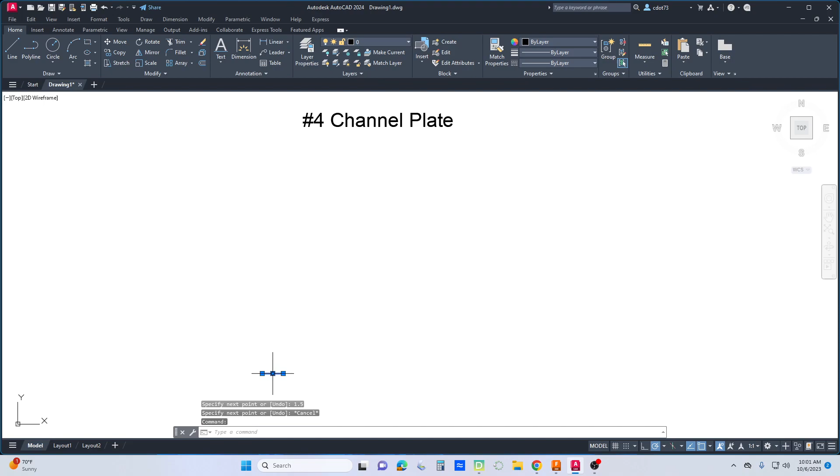So let's just get started. Let's draw a box first. Looks like it's going to be 1.5 inches wide. Let's do this. There we go, zoom in here. 1.5 inches wide.

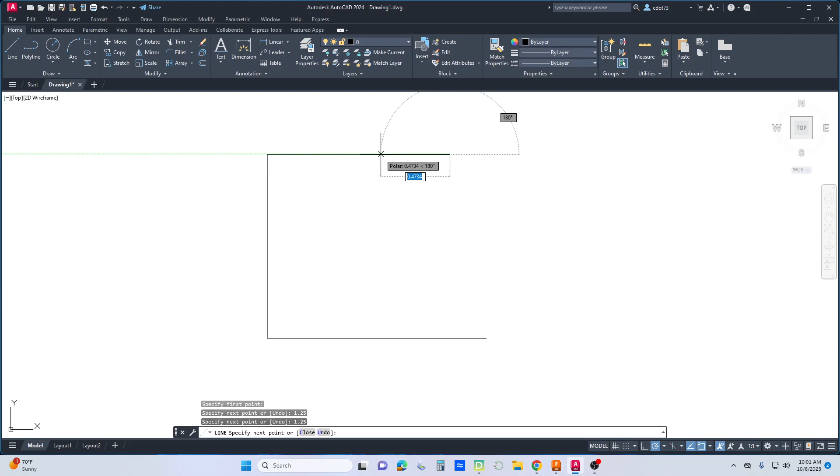On the height right here is going to be 1.25, and then we'll go ahead and go 1.25 on this one. It's running at a 45. I don't know what that's going to be right there, but we can do that later.

Let's do some offsetting. So start with this line right here. I'm going to offset it to the right 0.3, this way. Then I'm going to have another one. I'm going to go right there. I'm going to stop right there.

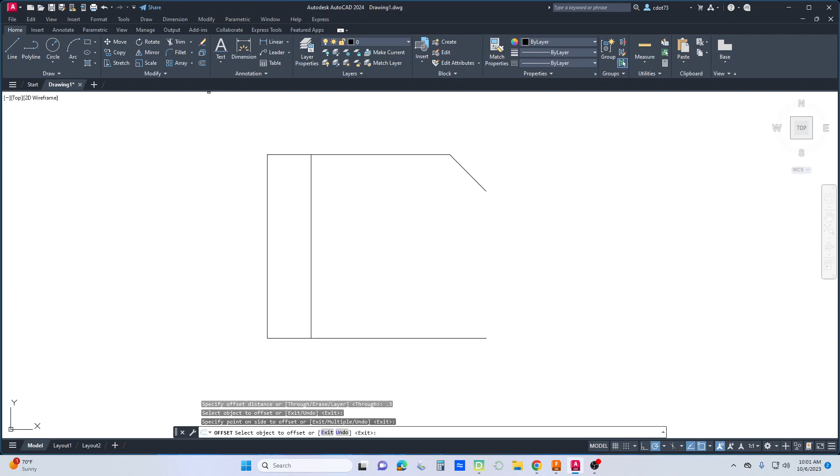Do another offset, just like this one right here. It's going to go down 0.2. This one's come up 0.2.

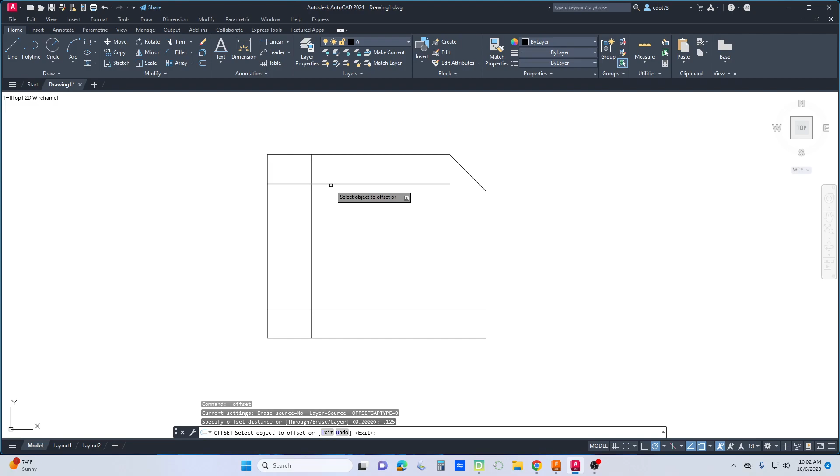That looks good. And then we need to do another offset. It's going to be at 0.125. And we'll bring this down here and this one up here.

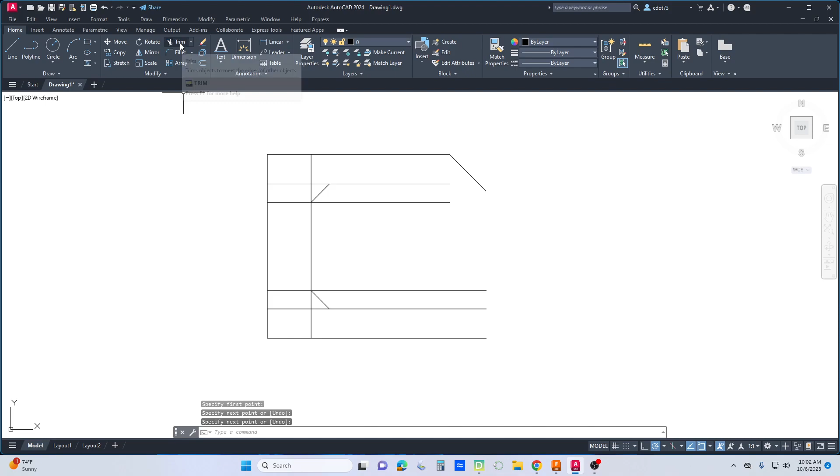Select your line command, right at 45. Repeat line. Do some trimming on this, trimming this out.

So far, so good. Let's work on the corners. So let's do some offset. Looks like it's going to be 0.25. Bring this back 0.25.

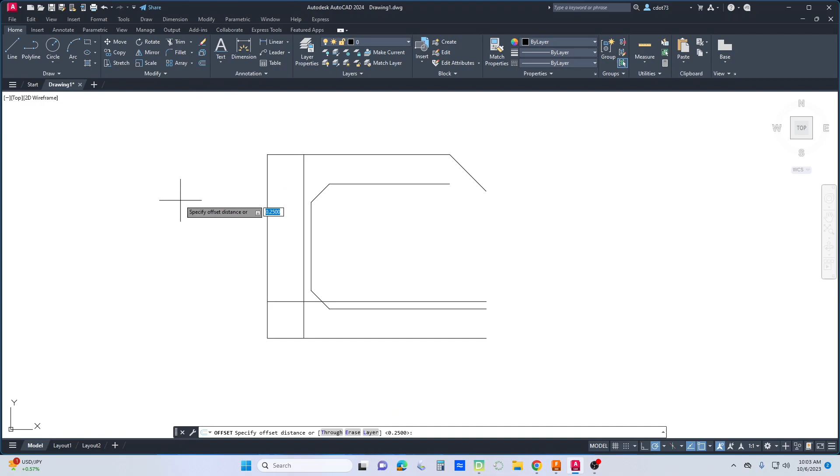Then we're going to offset off the bottom 0.25 once. And then we're going to offset this one right here. It's going to go up right here, and it's going to be a 0.75 right there.

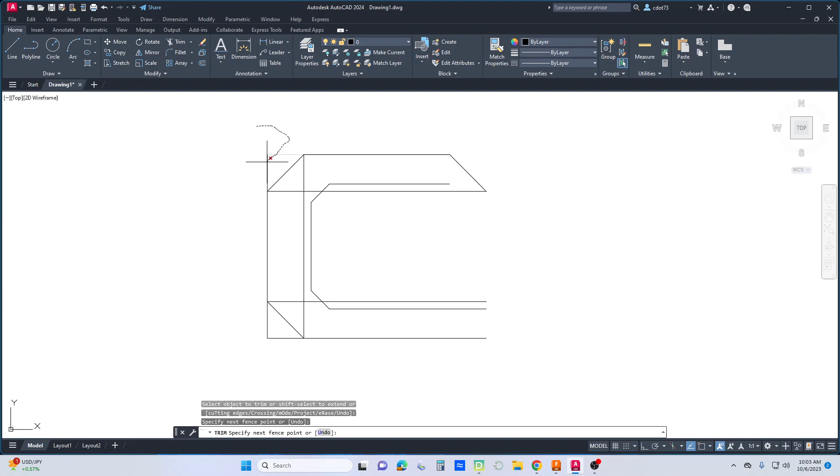We'll get our line command, we're going to draw on a line here. Repeat line, go here. Let's do some trimming. Enter. We don't need that anymore. So that takes care of the back part of this.

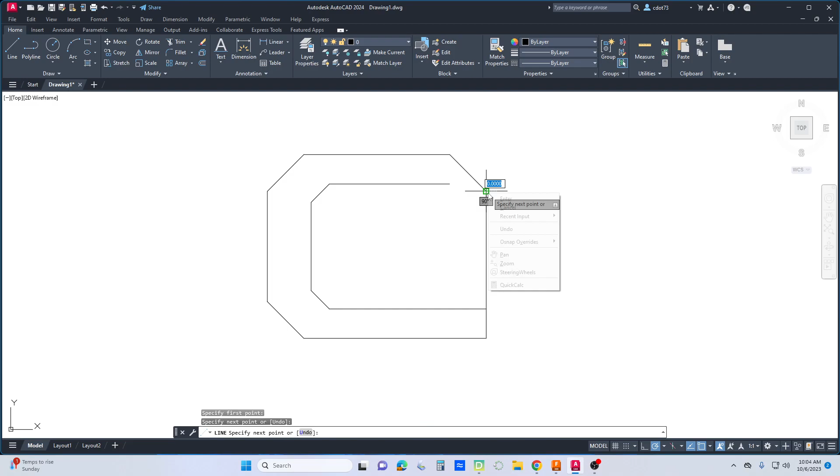Let's move up to the front. Go ahead and let's get a line right through here. Let's work on the bottom. I need to offset this line right here to the left 1/2 inch.

Okay, it looks like the bottom line, this line right here, needs to go up here. So we need to offset, and we're going to go 0.375. Set it right there.

And let's do some trimming. So I know I don't need this here. I don't need that, we'll leave that right there. I think I'm going to need to cut this out a little bit.

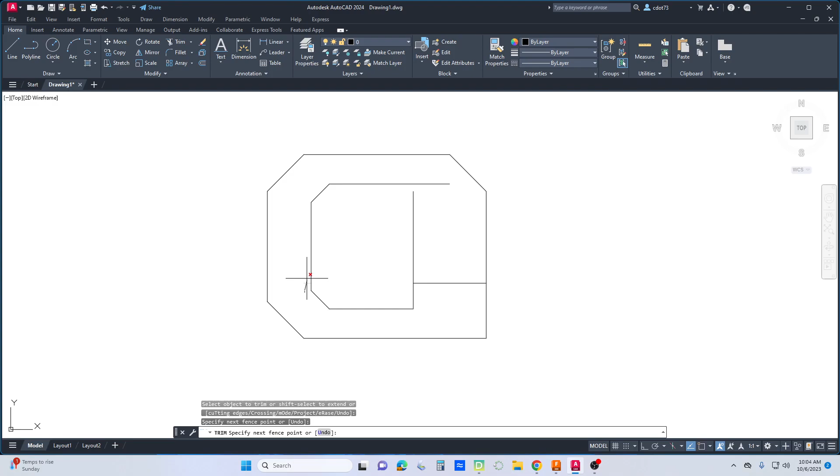And cut this. I do have an angle right here, and I know it's going to be 1.25 inches from here over to here. So let's do offset. And the distance you're looking for right here is going to be 1.25. See right there.

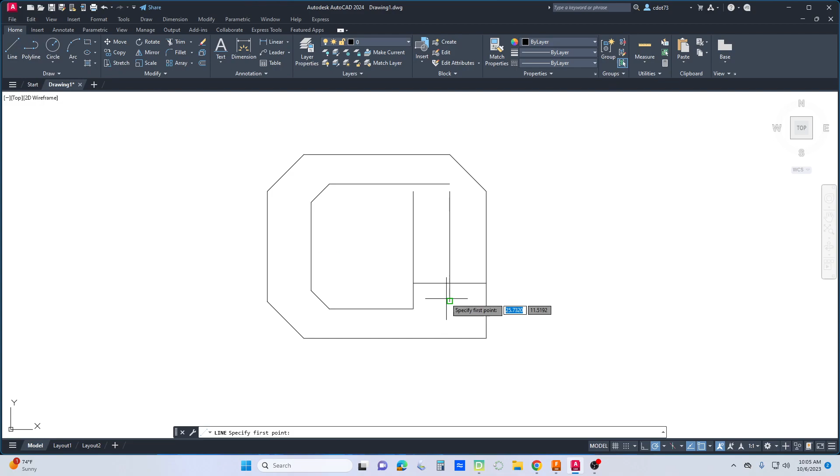And we're going to track with our line command, just track straight down, and we'll go right here, and then press enter. Then I believe that's going to be the same way up here, but we already had it right here, so we can get rid of that.

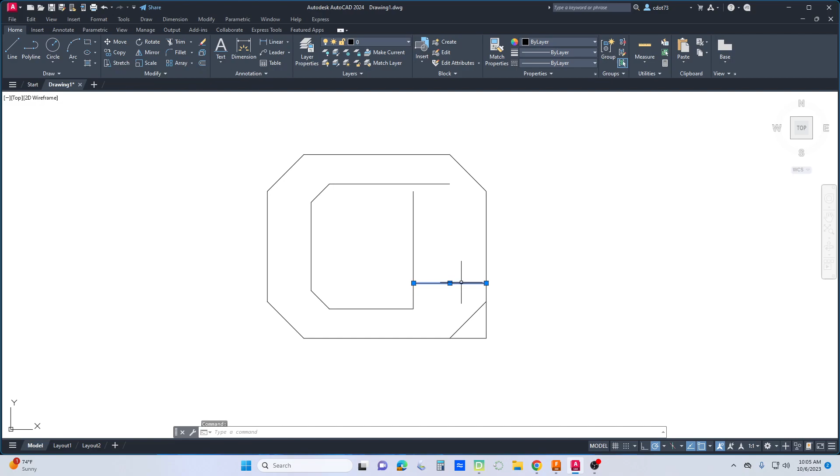Another thing we need to do is offset this one up right here to right here above it, and that distance is going to be 0.5, so we'll set it right there. Let's do some extending. Let's go back to trim.

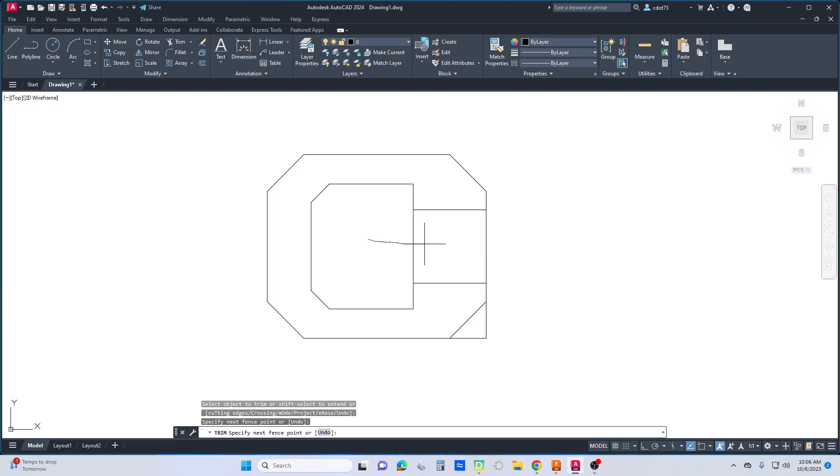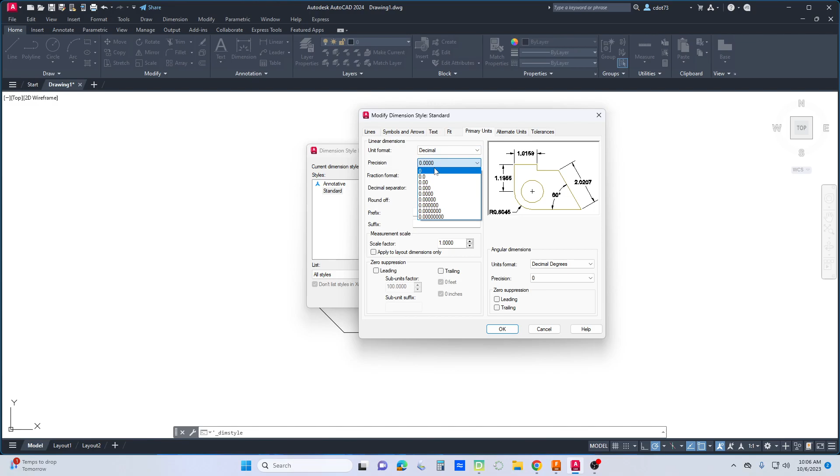Alright, dimensions. So make sure you have your menu bar, it's not hidden. You're going to go to Format, Dimension Styles, Modify, Primary Units. This one we're going to need 3 decimal places because we have a 125, a dot 125.

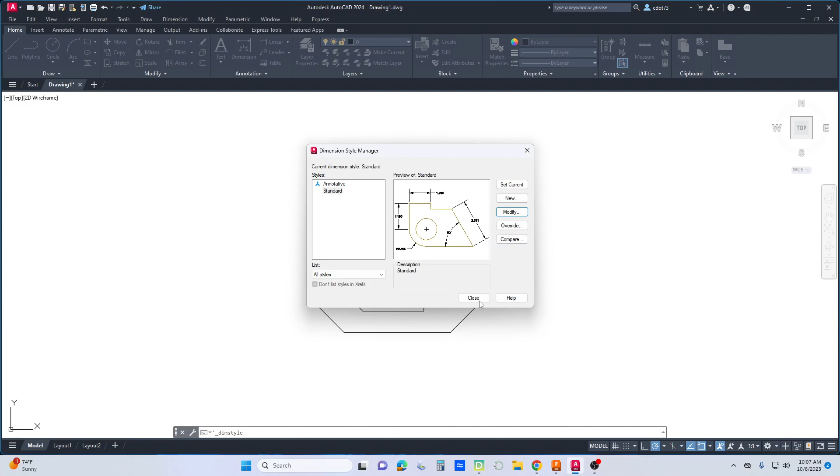On the text height, let's make the text height, let's try on text a 0.1, 1/10 of an inch. Okay close. So now when we put our dimensions, it should be alright.

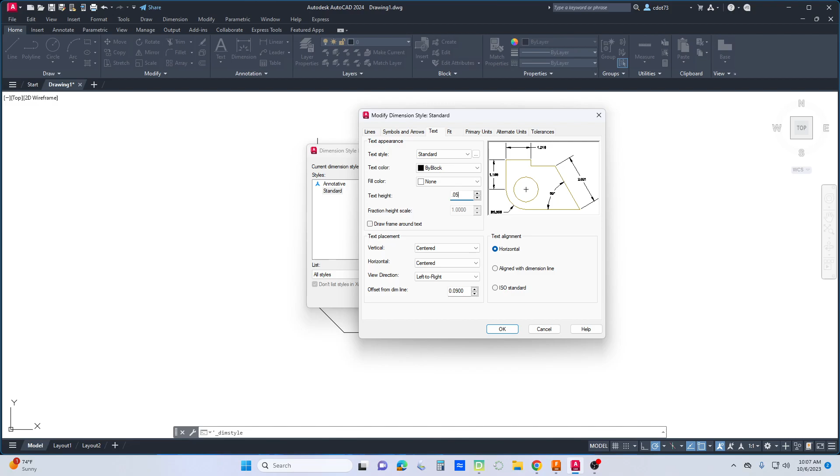Still pretty stinking big. Let's change the dimension style again. Modify. Let's go half that, let's go 0.05. Bet you the arrows are going to be big too. 0.1 on the arrows, let's see what that looks like. It's a little bit better.

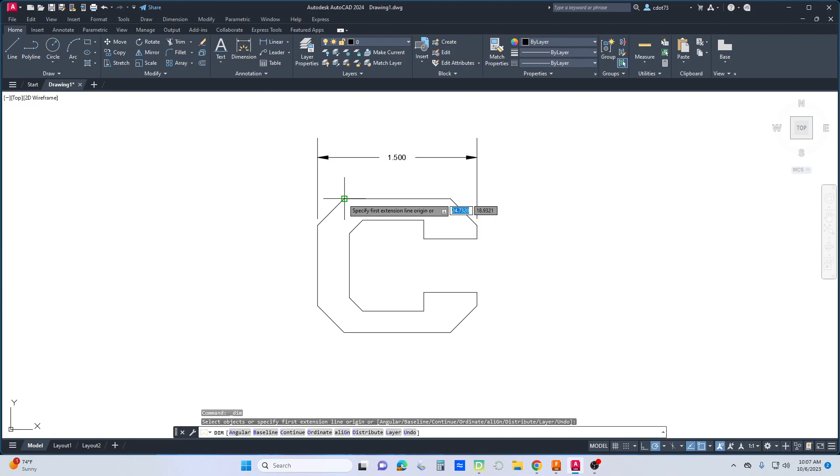Still a little big. Alright, so we're just going to put dimensions. You don't have to get too crazy with your dimensions. Just give me the overall, and we'll call it good just like that.

Do your single line text. Height, 0.1's fine. Ooh, not 1. That's not good. Let's go 0.1. I think I just had 1 in there.

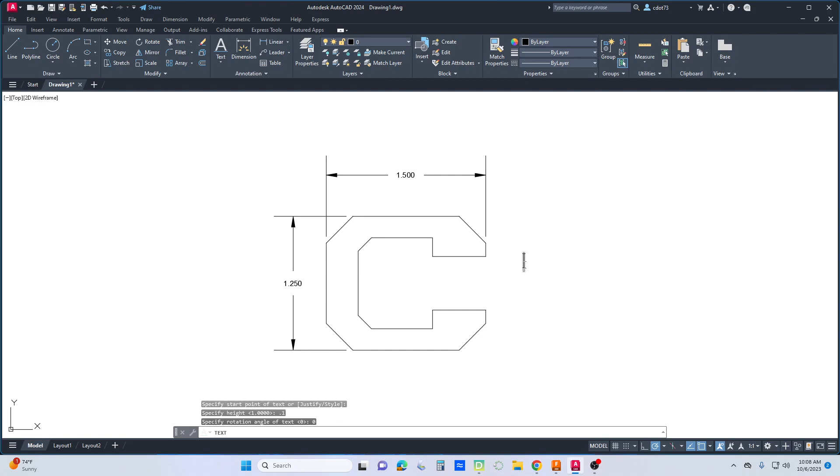Enter, 0, enter, and then you can put your text as channel plate, and then your name, date, period. Enter twice. Zoom extents. Remember, you always want to zoom extents.

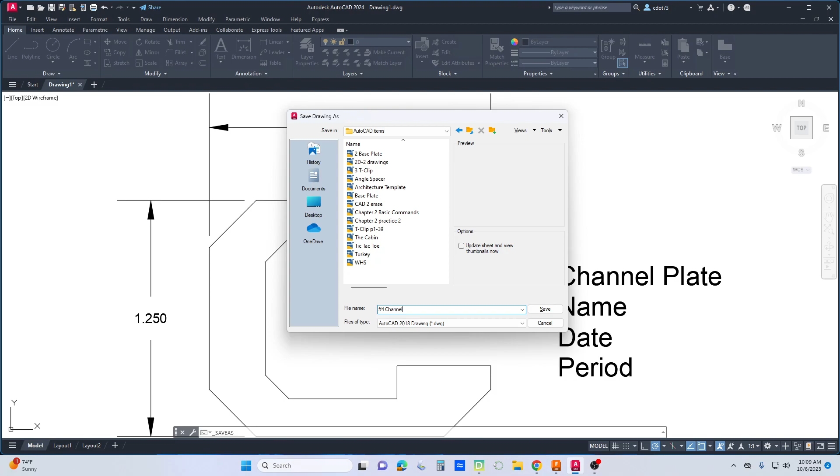You want to save this, so go to the icon, save as, and then you're going to go to your S drive, find your architecture construction. I'm going to put this in, and this is going to be number 4. I hope I put number 4 in there. And this is channel plate. Save it, and then we're going to print.

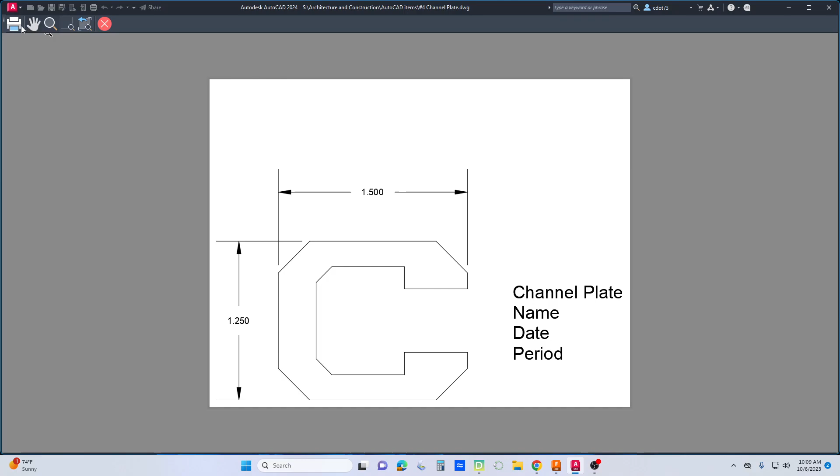So select your print icon, and then the installed printer is going to be the LaserJet Pro M501. What to plot, your extents, preview it, and then print and turn it in. Go to your next assignment, please.